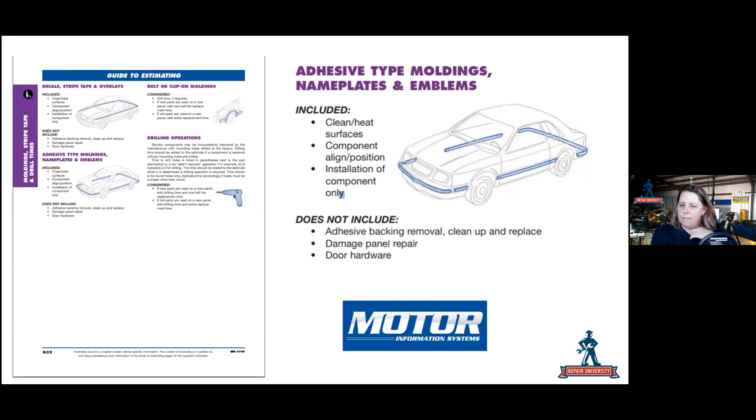Keep in mind also that CCC doesn't include any templates or measuring the templates out or aligning them properly to place that emblem or molding, because sometimes you wind up with an emblem that's this big on a door panel this big, on a very flat surface, so there's no way to tell where it's going to go. Sometimes you have to make a template off the original panel before you take the panel apart.

Here is the DEG - what is this, a tracking number? So this would be DEG 563. This basically was an inquiry of the procedural pages on a lift gate.

This happened to be for a 2018 BMW X5. Issue summary: when replacing a nameplate or emblem, BMW repair instructions call for making a masking tape template to transfer the original position of the emblem to the replacement panel. It is labor and material that is not included with the replacement of the emblem or nameplate. BMW does not sell templates like other manufacturers. Suggestion: please specify if making an actual template is included or not included in the nameplate process.

So this got closed pretty quickly within a day. Motors stated, after review of concern, creating templates is not included in the estimate work time. So there's the document number for you guys and stuff like that.

So let's look at a 2019 Honda Accord emblem sticker removal and installation that they have on here. As you can see here, for the Honda H emblem, adhesive tape thickness is 0.8 millimeter. They have the push nuts that are in there. For the rear Accord emblem, they're telling you the actual measurements.

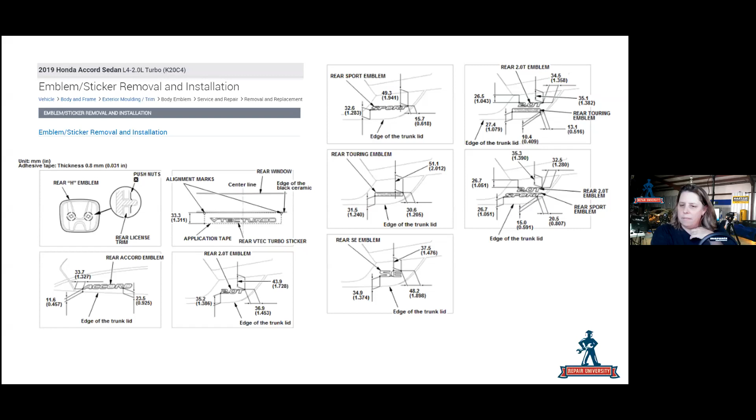And discard them and keep that in mind. Also, sometimes they do give you the measurements, and that makes it a little bit easier, but you still take a picture of where they go so you know you have the right emblems for it.

Now, for those of you who go onto the Service Information System, SIS, you can go into Honda's website and you go into the service information. I just picked an MDX on this one - I was looking for something else, and I knew about this video.

And you have it - install those adhesive-backed accessories trouble-free. So basically, Honda's showing you how to put on a body side panel molding on an MDX, which is obviously something custom from the factory, because the truck doesn't come with body side moldings on it. But we're going to take a look at this, and I broke the video out into just 2 or 3 slides here to show you.

So once again, read the OEM procedures. Components must be a minimum of 60 degrees Fahrenheit, free of all grease and dirt. Soap and water has to be clean. You always got to use a dry, lint-free cloth. An alcohol pad's going to be required to wipe the area down, then you're going to have to wipe it again. Now, when you wipe with the alcohol pad - and this goes with anything else - you have to wipe in one direction, you can't go back and forth. You have to wipe just straight across the panel and keep going. Let it air dry out.

The templates, if they're supplied, that's great. If they're not, you're going to have to make one. Sometimes you have to cut them - sometimes they're made for 3 or 4 different vehicles, and you have to set it or cut it for the size that you need it for. You're going to have to measure and mark the location of the template so you can line it up for where the molding goes, especially when you don't have a body line to go off of.

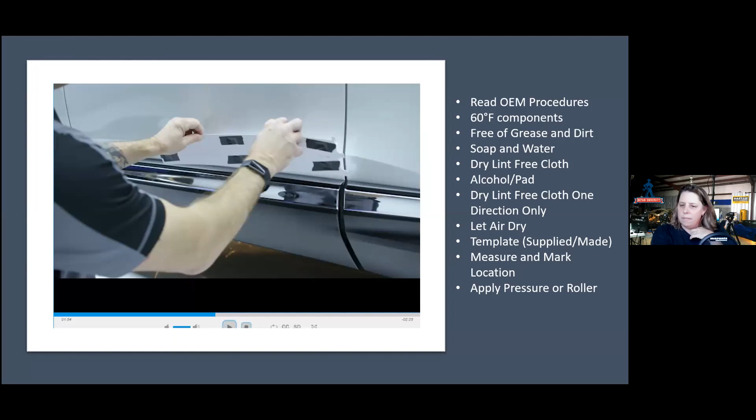It's basically a couple of tabs at one side of the door, and a couple of tabs at the other side. You've got to measure it for the right location, and then you're going to have to apply pressure along the whole panel, or just with a roller, and we'll get to that in a minute.

The video shows you on the two verticals in the front and back, you're going to remove those small tape protectants. Then you're going to peel the tape back off one edge a little bit, and tape it to the front side of the molding. So now you'll catch one side of it and put some pressure on it.

As you go along, you'll keep that line up to the proper area on the template. And as you pull off the orange protector in this case, you'll pull that along and give it a little bit of light pressure.

Honda requires you to use this roller with the application of any of their moldings or emblems, and it gives you a nice pressure feed across the whole entire panel. If you have Hondas and do this, you can use it for other cars too. It comes in handy - it's a T/N MHLE54D roller you can purchase. If you're a Honda certified shop, you should already have this in your toolkit. Other companies have similar tools like this.

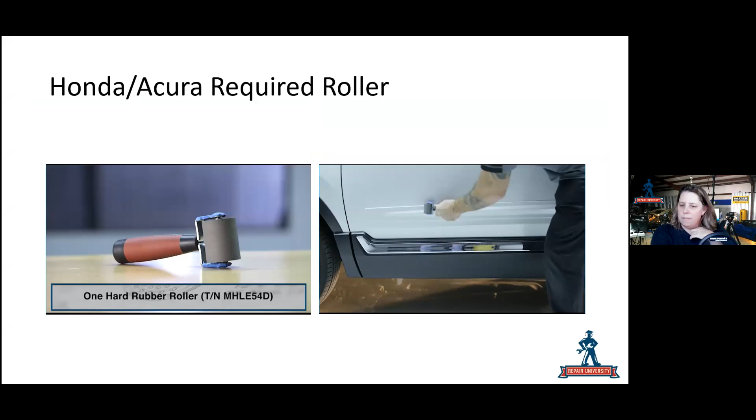GM - here's a good example of something you should measure before you go ahead and do any type of repair, because in this case, the C-pillar trim nameplate, this LT that sits on the quarter panel, really isn't lined up to almost anything. You don't know exactly where this goes because it doesn't give you a lot of information. So you might want to pre-measure it before you cut the panel off, and make sure you take a couple of photos of it and know what's going on with it.

Their procedure requires 70 degrees prior to installation, and it should remain at this temperature afterwards. So make sure you don't just heat the panel up and then not do anything to it afterwards - you've got to keep it hot. This can be a heat gun or some sort of heat lamp.

Clean any residue with a 50-50 mixture of isopropyl alcohol and clean drinking water. You can mix that up and it'll help take off this glue quickly. When removing protective liners from the adhesive tape, be careful - do not touch the tape with your hands, and do not allow the tape to come in contact with dirt or other foreign matter. Use the palm of the hand to wet out the center pillar trim level nameplate to ensure full adhesion is made. Just make sure you line it up properly, because it sits in the middle of nowhere.

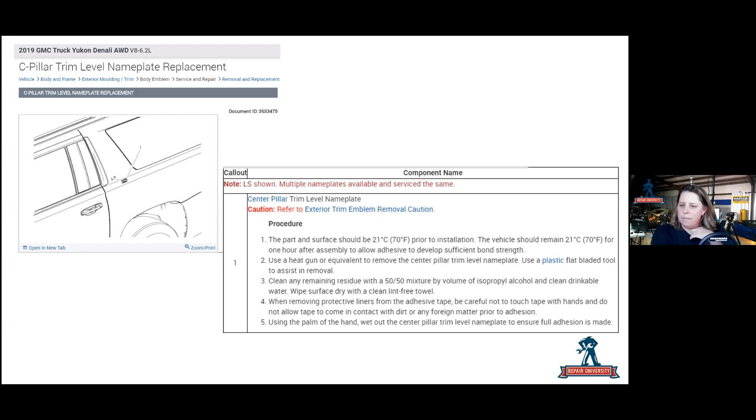Here's an example of a Subaru Forester, where I lined up some tape to show you some measurements you can take off of this. Over here, they show you the measurements they're utilizing on this particular one, and how to line this up with a decal that comes with it.

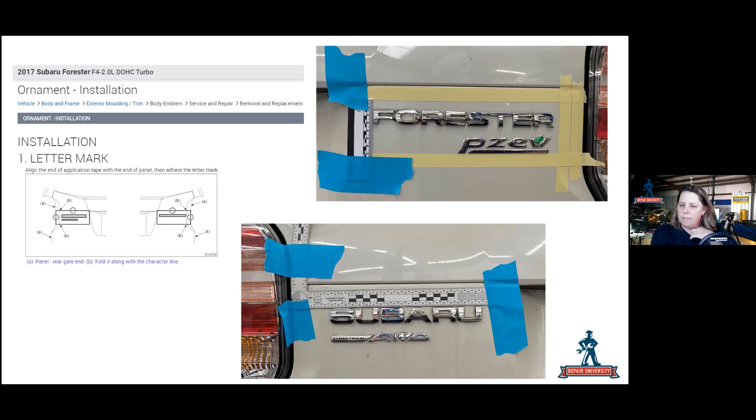I've found a couple of times these things aren't cut exactly perfectly. So make sure you measure out where this Subaru all-wheel drive Forester and PZEV emblems go. Keep in mind that nothing looks worse on a car than if the emblems are in the wrong spot, not lined up properly, crooked - that's bad too - or on the wrong side of the car, that looks horrible, and we know the car's been worked on or somebody's done something to it.

Here's BMW. BMW is a little bit different with their TIS, the way they give it out. This is an F30 335i, and they're going to go over this particular vehicle. They give you the consumables: you need a cutting cord, basically like a fishing line to cut it off, masking tape 19 millimeters or 30 millimeters wide, yellow plastic adhesive tape, eraser disc, and cleaning agent R2.

They want you to transfer the position of designation from the old trunk lid by making an adhesive tape template. For paintwork, keep the adhesive tape template up to installation, sticking the masking tape near the edges. Make sure you know exactly the distance of the edges and measure it out, then you can detach this tape and bring it over.

What I've also found out that works pretty well on BMWs is the 3M Spark paper. Works nicely.

Making a template for things like this comes in handy. You can align it to where you need it and just double check it, but that does come in handy.

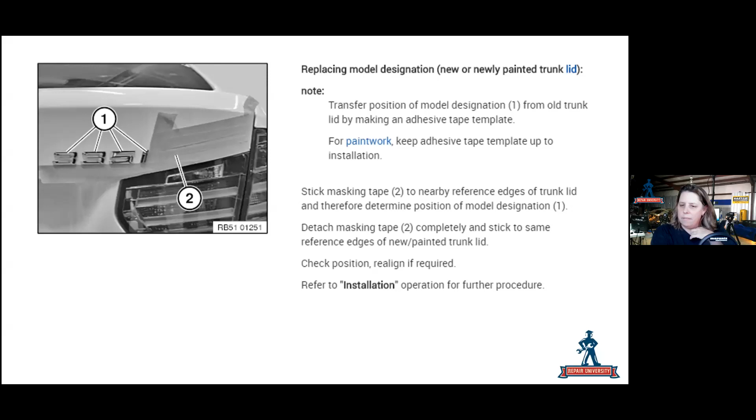Obviously using the tail light, the edge of the trunk, and the body line helps line up everything nice and easily. You can see here they're just showing more versions of it. This is how the emblem comes with the little plastic tape, so it's already lined up for you. You don't have to put each individual letter on, which makes it a hell of a lot easier than doing anything else on this. So this does come in handy. Obviously the BMW circle in the middle is already preset to where it has to go, so that comes in handy for you guys.

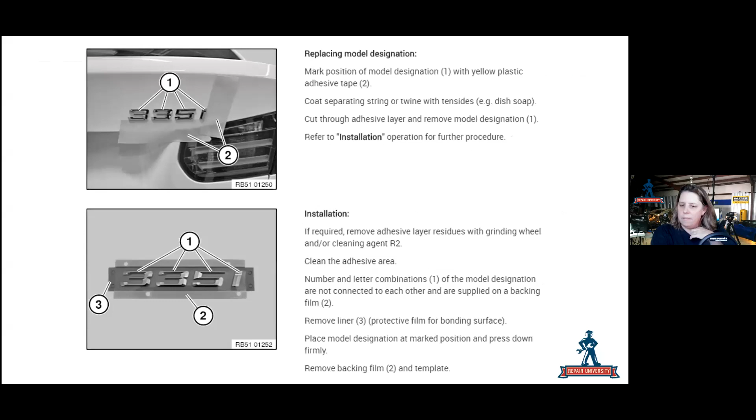People have talked about this. Years ago, myself and James Moy made up a little challenge to people. This is prior to ADAS systems being on cars so prevalently, and a lot of other things were going on. So here's a 2019 Toyota Camry, one emblem, two nameplates on this particular vehicle.

Let's look at the nameplate removal. When removing nameplates, a luggage compartment emblem, heat the luggage compartment panel and nameplate using a heat light. They want it at 100 to 140 degrees Fahrenheit. For the door emblem, 68 to 86 degrees. Be careful because it's going to get hot. 104 degrees is going to be very, very hot to your hand, and you want to watch what you're doing with this.

Obviously they tell you don't touch the heat light. Heated parts might result in burns, and touching heated parts for a long time will result in burns. Really, thanks guys for telling us that.

So you have to put tape around the outside edges of any of the emblems when you do this. This will prevent any scratching or deep scratches to the area. You're probably going to make some rub marks, especially on dark colors, by doing this, but this is how you're going to remove the emblem.

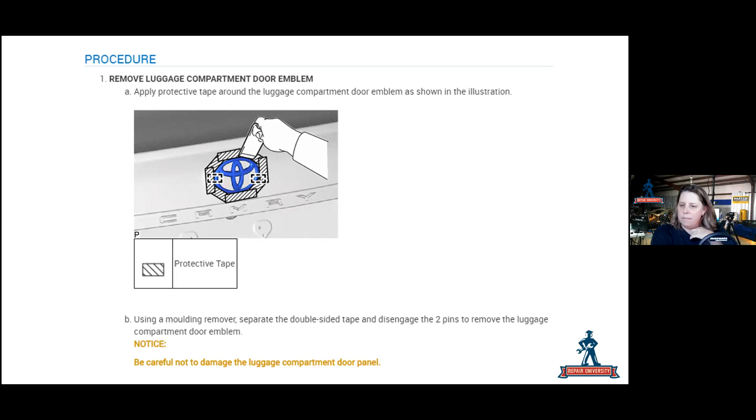After you heat it up, you're going to disengage the two pins that come with the door emblem. For the luggage compartment area, you have to mask off each one of these letters so that you don't scratch it.

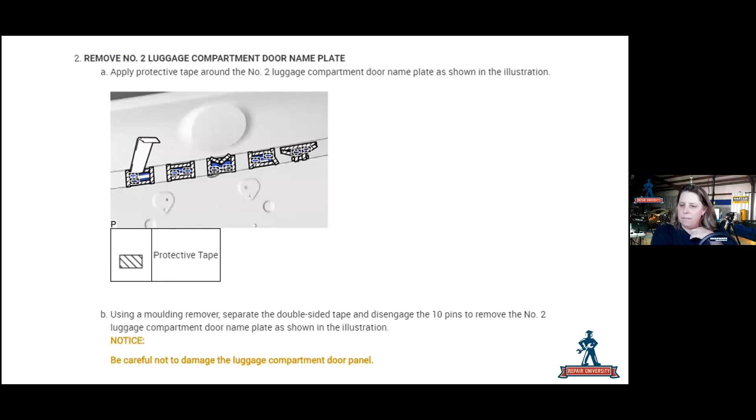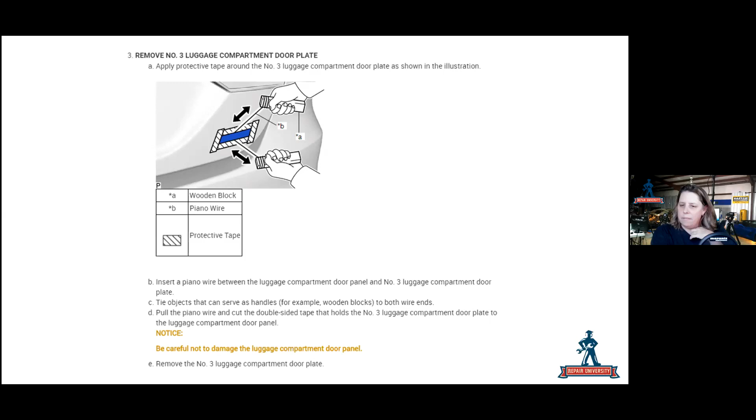For installation, once again they want you to heat the panel up again using a heat lamp or other heating source, then remove any removable double-sided tape. Clean the tape off, wipe off the adhesive with a cleaner, heat the panel up, and there are some pins that'll be installed for the Camrys.

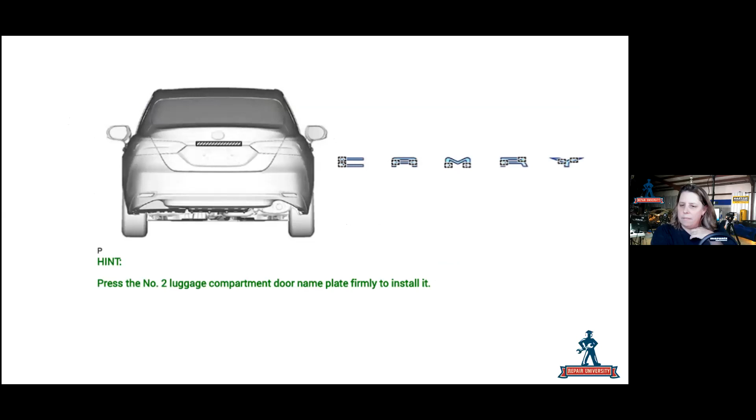These have little areas here, so there's really no lining this up. There's already pins pressed into that area so you can line these up pretty easily. The same goes for the luggage compartment emblem, which has two alignment pins on it also, so that makes life a lot easier when you're trying to line these up.

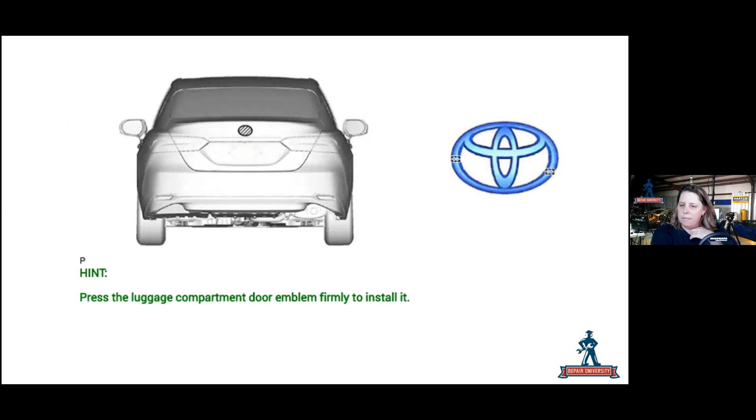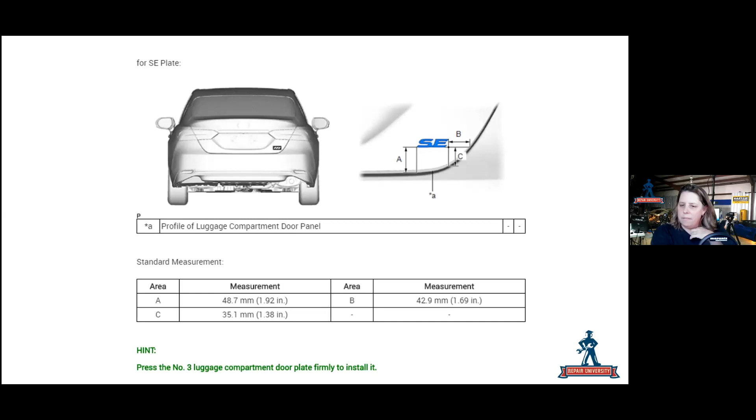So maybe a couple pieces of tape would help you out on this, or actually taking a picture before you do this so you've got a really good idea where it goes. You might get it in the right spot by just guessing, but it's going to be crooked unless you line it up properly. Now the LE, XLE, and SE are all slightly differently aligned from each other, as you can see here. They're primarily in the same spot, but the numbers are off a little bit as far as the measurements go.

So this gives you an idea of what you would have to do with the repair to it. Now, my argument back when we first came out with this whole idea of doing this estimate was, well,

somebody stole the emblems off the back of the car. The customer wanted to change them for some reason. There has to be a reason why someone's just going to come in, and we were trying to isolate just the procedure itself.

So we went ahead and decided to do this. We made the challenge out there, and I believe it was like $560 on a black car. That was the main keyword. There was a black car that was going to sustain a little bit of scratching to the paint that would have to be buffed out afterwards.

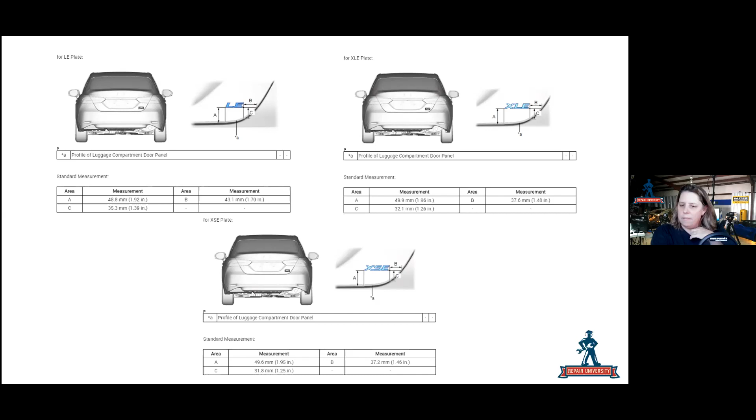That's basically what we try to go with when we had that original program for it. So a couple of things have changed in time. So let's look at this. We do this sometimes to be funny and stuff.

And obviously we've all heard, well, we don't pay for that, and we don't care. And you guys will just argue, well, the OEM says it must be done. But very few of you will go ahead and say, well, let me get the customer involved. That's what you need to do. Get the customer involved. It's not your fight, it's not your argument. The OEM says you have to do it, you as a shop have to do it.

Actually, there's some associations out there and some people in this industry that are actually trying to fight to make state laws that you have to do it according to what the OEM says. So basically you're forcing yourself. You have to do it the way the OEM says. And if the insurance company doesn't pay you and you don't get the customer involved, well, guess what? You're still liable for it because you had to do it. There's a law out there, but you're supposed to do that anyway. Follow what the OEM says as far as their repair goes and stuff.

So we can have a little fun here. Well, I brought the vehicle owner in, and of course the vehicle owner was told by the insurance adjuster, well, we don't pay for that. So the customer in this case decided to have a conversation with the adjuster and asked him again, well, do you pay for it now? And of course the adjuster was like, well, please stop talking to me so loudly. So the customer decided to ask the adjuster again, so who's your daddy now?

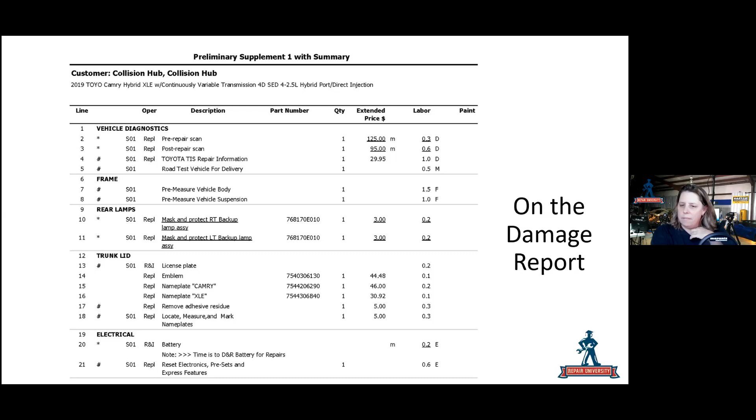You don't, but keep in mind this is also a hybrid. Did you notice that? It's a hybrid vehicle. You shouldn't be working on a hybrid vehicle, or any vehicle for that matter, in a regular 12-volt battery vehicle without disconnecting the battery. You're supposed to - it says it in the repair manual basically 3-4 times before every procedure that you have to disconnect the battery.

Airbag system diagnosis - well, you're going to disable the bag, excuse me, you're going to disconnect the battery. You should really be pulling the fuse in most cases to make sure the airbag can't deploy in any way, shape, or form. You'll do a system diagnosis after you're done with this, because the car's in your shop, you have to make sure the vehicle safety systems are working properly, that there are no codes or diagnostic trouble codes that won't set a malfunction indicator lamp, or the airbag light won't come on, which does happen. Jake Rodenroth from asTech has said it numerous times.

So has Chuck Olson from AirPro, talked about it numerous times about these issues you don't know about. Now, once again, we don't know if the vehicle's been involved in a collision or not. Prior to this, well, you got to test the seatbelts and the seatbelt locking mechanism. Once again, I'm just going by the book, guys. You can pick and choose what you do and don't want to do.

So I'm going to pre-repair wash the car and degrease it. I have to put a floor mat in the car. I'm going to have to cover the car for buffing, because I'm going to have to go ahead and buff the panels that are on this car, because the panels have what? Well, I told you the car was black. So we're going to have to go ahead and polish, put down 4 glaze and polish the panels, because you're going to leave small scratch marks by the person stealing the emblems.

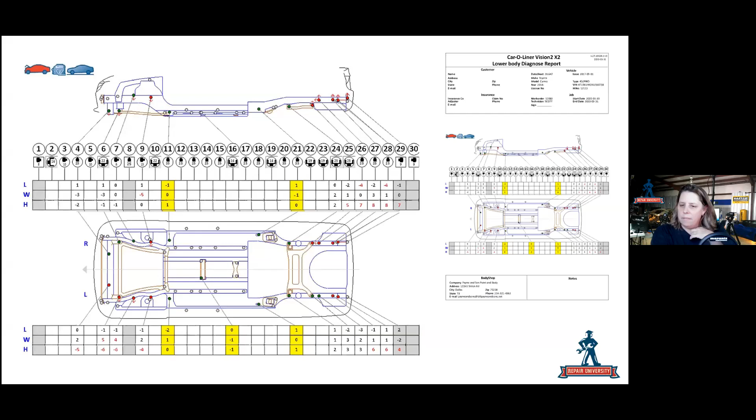We have issues where sometimes emblems are discontinued. Emblems are custom or specially made for a particular model of vehicle, and you just can't get these things again. They were one-offs, maybe from an older restoration. Well, 3M has these press-in-place type stickers. Now, you know me, I'm a proponent of the factory sells them, you go buy them. I'm not reusing emblems or anything like that. This is for when they're not available. That's my pet peeve, my personal opinion on this.

So if they're discontinued, you can go ahead and use these. Basically, you're going to have to spend a lot of time cleaning the backsides of these things, get them really, really clean. Then you're going to wipe them with isopropyl alcohol, let them air dry after wiping with a clean cloth, and then you're going to press this clear adhesive on the backside of it. You're going to squeeze it down really good.

Let it sit for a few seconds, then you're going to pull it off. If you pull it off the right way, it's going to leave that little hole in the 6, that little indentation at the top portion of the 6, and cut around the outside of it.

Same thing, like when you go across the word Mazda, it'll cut out all those areas for you, so you really don't have to use an X-Acto knife, which we know can take a very long time to go through.